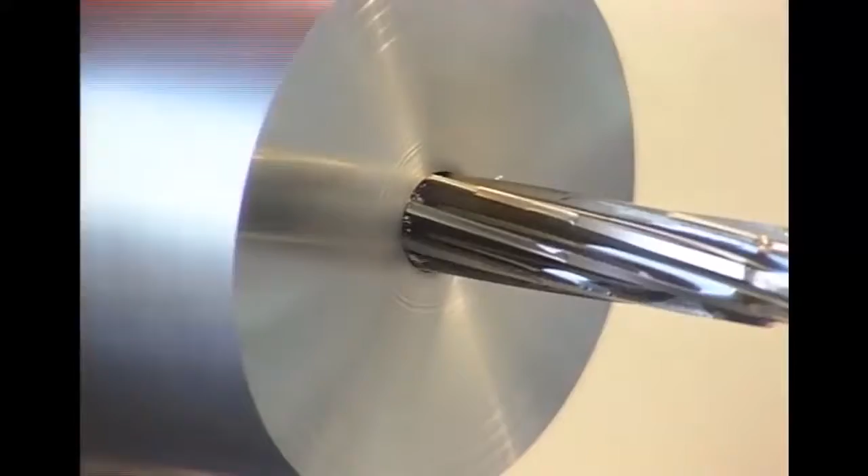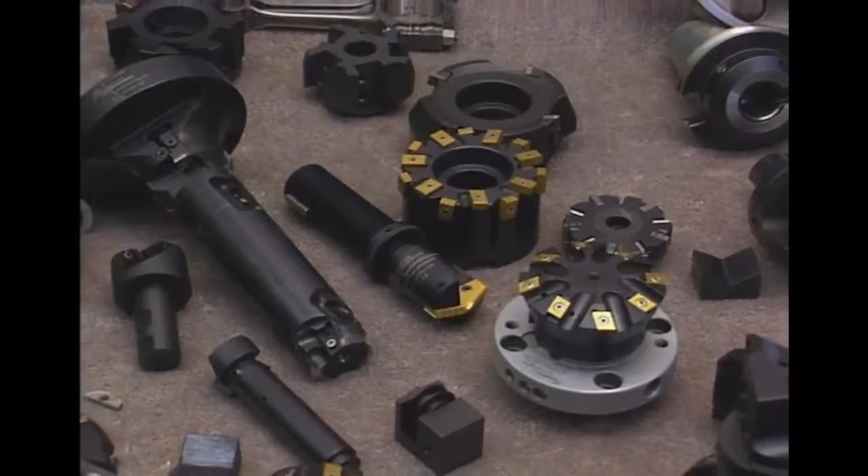Tooling incorporates thousands of different cutting tools and tool holders for discrete parts manufacturing. Principal categories within cutting tools include single-point cutting tools, such as lathe tools, multi-point cutting tools, such as milling cutters, drills, reamers, and taps. Cutting tools are either standard tools, purchased as catalog items, or special tools, designed and built for a special machining job, often to suit a particular workpiece.

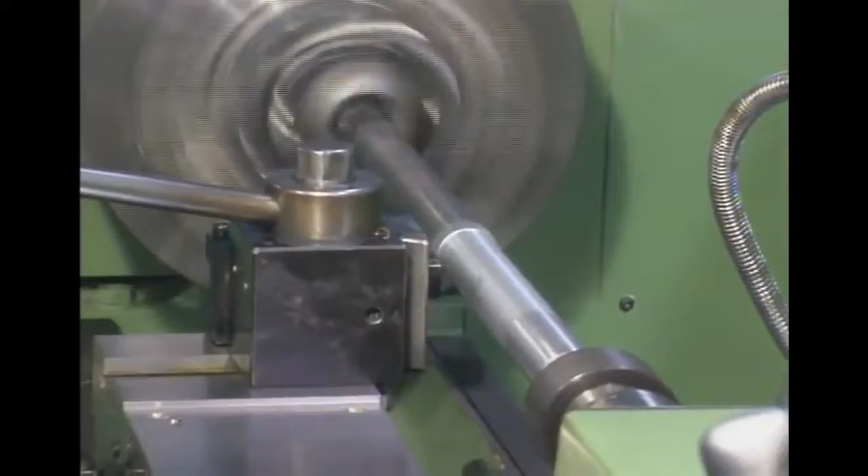The main objective in the selection and application of cutting tools is to safely machine a workpiece in the shortest possible time while meeting the part's quality requirements. Furthermore, the specified tooling should be the least costly and least complex tooling available to satisfactorily fulfill the qualitative and quantitative workpiece demands. It is estimated that nearly 50% of all cutting tools are used incorrectly.

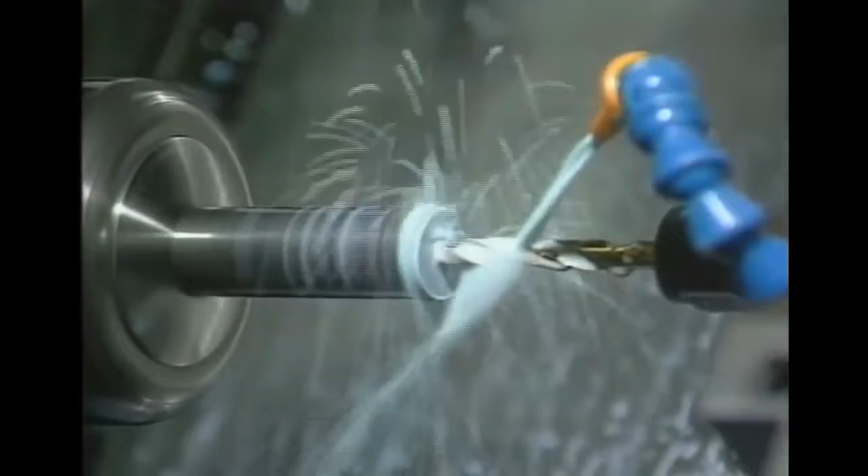Additionally, the number one error when formulating tooling selections is calculating monetary savings based on lowest cost per tool rather than on maximized productivity and extended tool life.

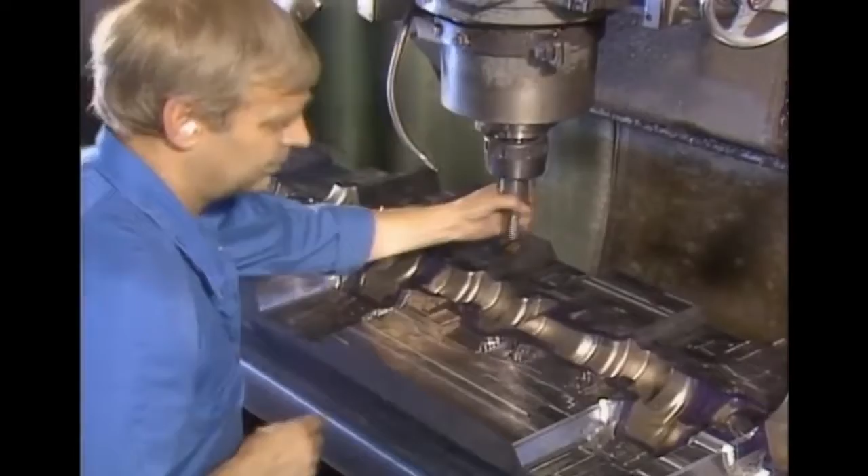To effectively select tools for machining a part, a machinist must have specific information about the workpiece, such as the starting and finished shape, the hardness, the tensile strength, and abrasiveness of the material. These factors all influence the interaction between the tool and the work. The machinist also needs to know whether the workpiece material breaks into short chips easily or whether it tends to flow into long, hard-to-break stringy chips.

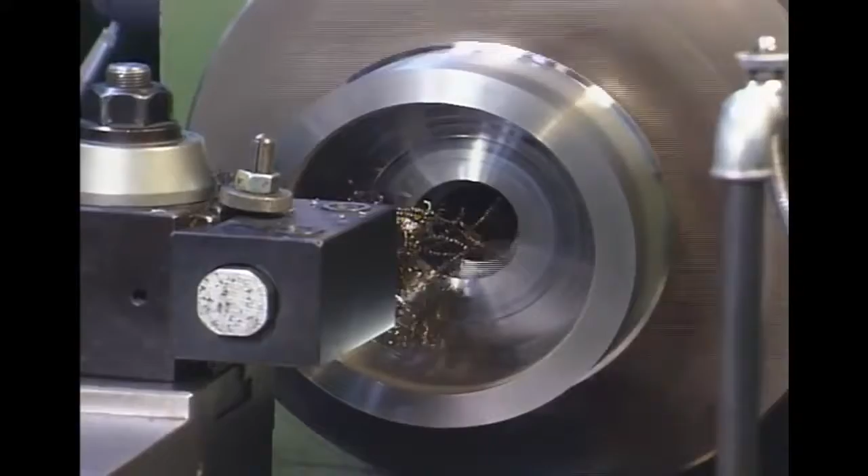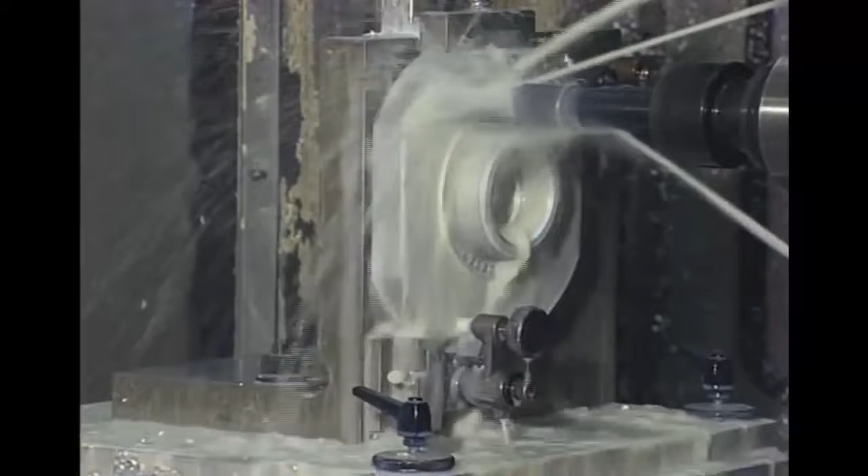Also important is the part's work-holding setup, which properly orientates and holds the workpiece, and the power and speed capacity of the machine tool. Changes in the workpiece material, part tolerances, geometries, and quantities required often demand corresponding changes in the tool materials and/or tool geometries selected.

For the wide variety of machining applications, there is a corresponding necessity for different cutting tool materials. The ideal cutting tool material should be harder than the workpiece it is cutting, be able to retain its hardness and stability at high temperatures, resist wear and thermal shock, be impact resistant to withstand the mechanical shocks of milling, and also be chemically inert to the work material and the cutting fluid.

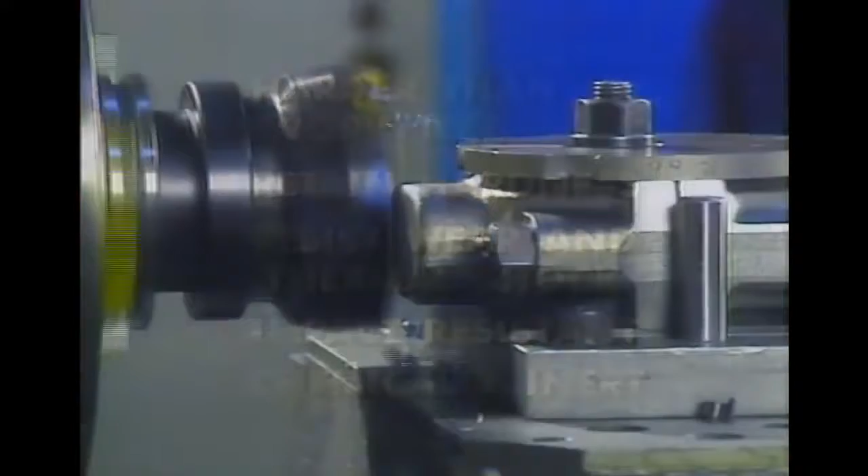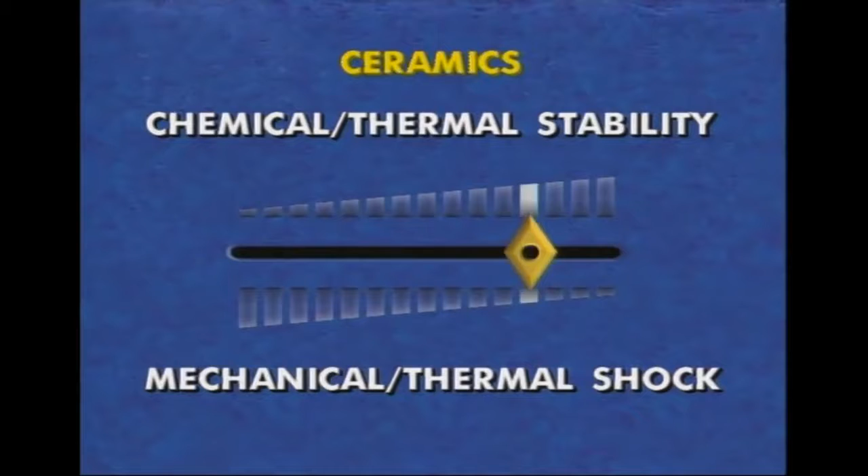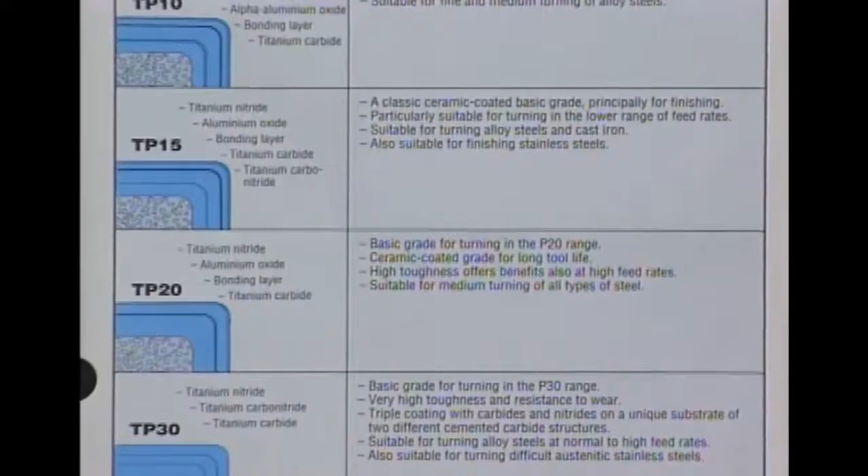No single cutting tool material incorporates all these qualities. Instead, trade-offs occur among the various tool materials. For example, materials with excellent chemical and thermal stability, such as ceramics, tend to be brittle, with limited resistance to mechanical and thermal shock. These variable properties take place both within a material class, such as different grades of carbide, as well as when comparing different classes of tool materials, such as high-speed steel and carbide, or carbide and ceramics.

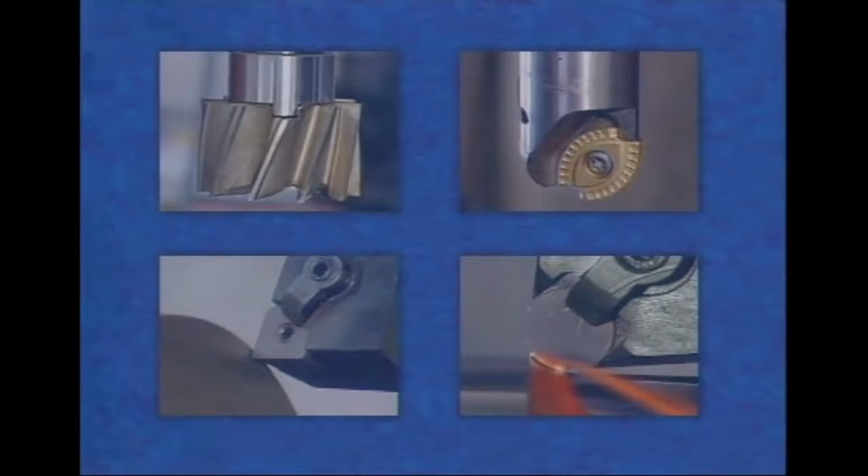Every new and established tool material has an application area in which it outperforms the other cutting tool materials. Newer materials tend to minimize but not eliminate the application of older materials, such as high-speed steel. The development of cutting tool materials has offered steady advancement in the rate of metal removal and, consequently, in the need for more heat-resistant materials. So there has been a progression from high-speed steel to carbide to ceramics and onto other super-hard cutting tool materials.

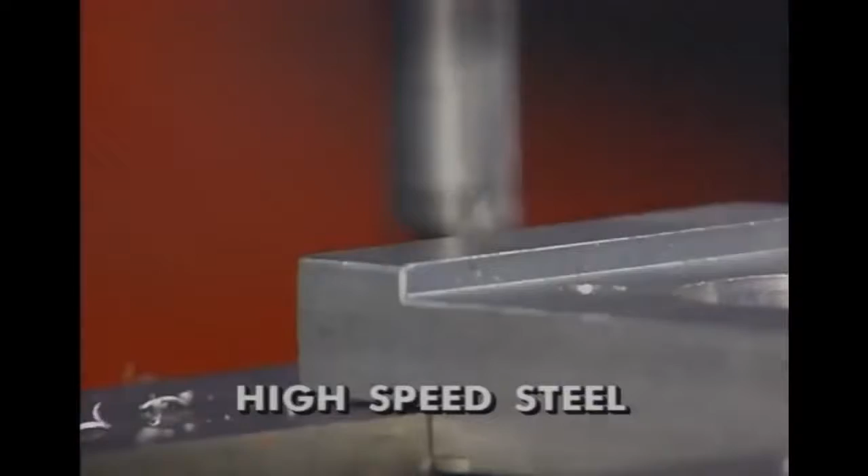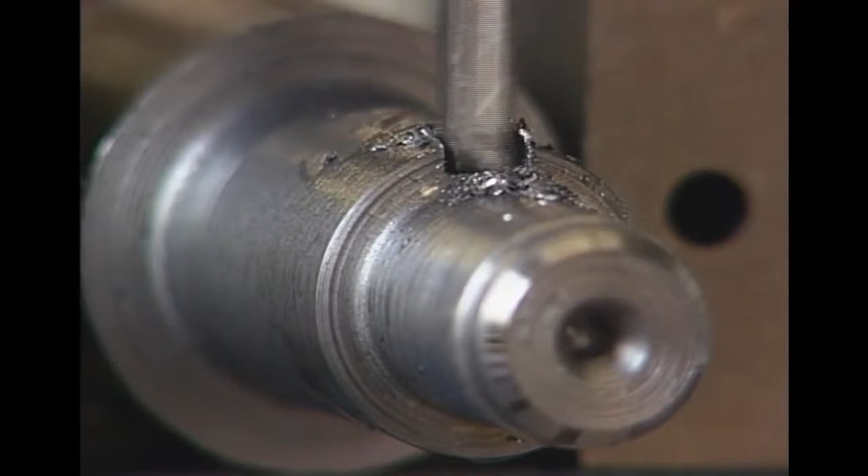High-speed steel tools were introduced around 1900 and gradually replaced the carbon steel tools of the 19th century. High-speed steel cuts about 4 times faster than the carbon steel tools they replaced, hence the name high-speed steel. It operates at temperatures up to 600 degrees centigrade. There are over 30 grades of high-speed steel in 3 main categories: tungsten-based, molybdenum-based, and molybdenum cobalt-based.

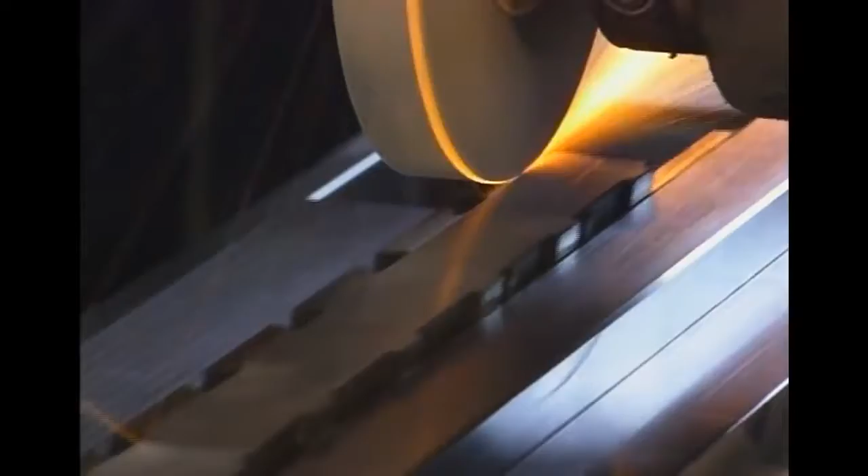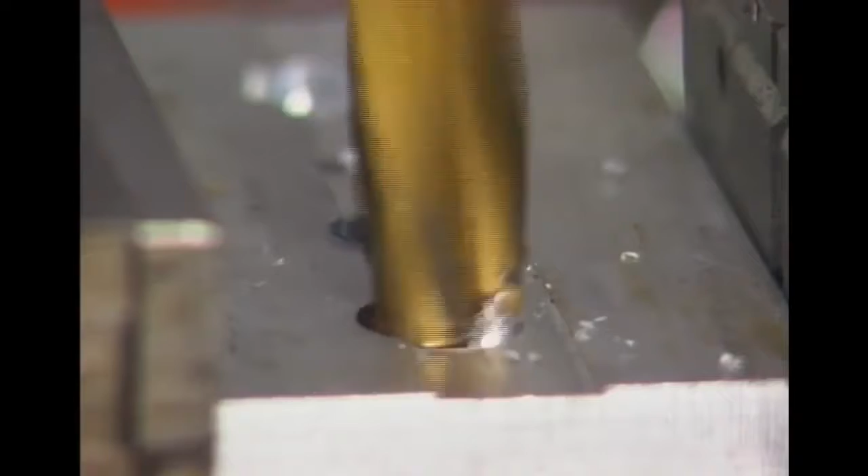Since the 1960s, a form of high-speed steel called powder metallurgy high-speed steel has allowed tools such as drills, milling cutters, and form tools to be made to near-net shapes that offer superior grindability. The use of coatings, particularly titanium nitride, allows high-speed steel tools to cut faster and last longer. Titanium nitride provides a high surface hardness, is resistant to corrosion, and minimizes friction.

In industry today, high-speed steel tools have been replaced by carbide tooling in many areas, but high-speed steel tools are still preferred for some tool room and low cutting speed operations, and for certain tool types such as small diameter drills, taps, and end mills.

Carbide tools were introduced from Germany in the 1930s and today are the most widely used cutting tool materials. Carbide and coated carbide tools in general cut about 3 to 5 times faster than high-speed steel and operate at temperatures up to about 1200 degrees centigrade.

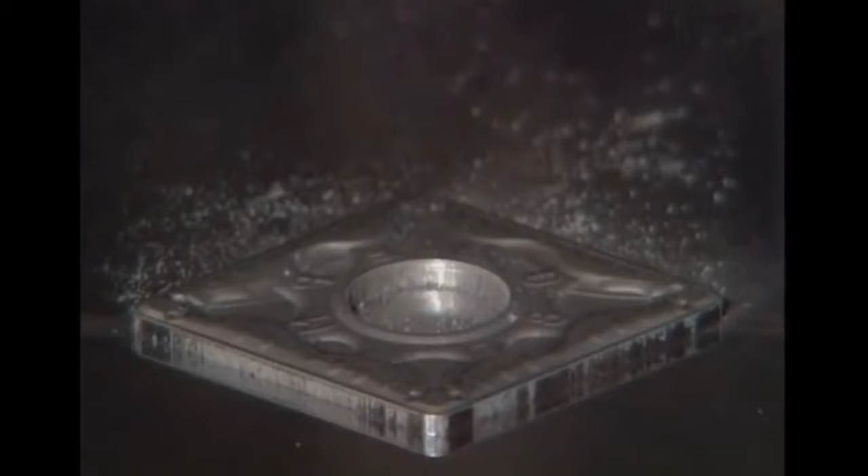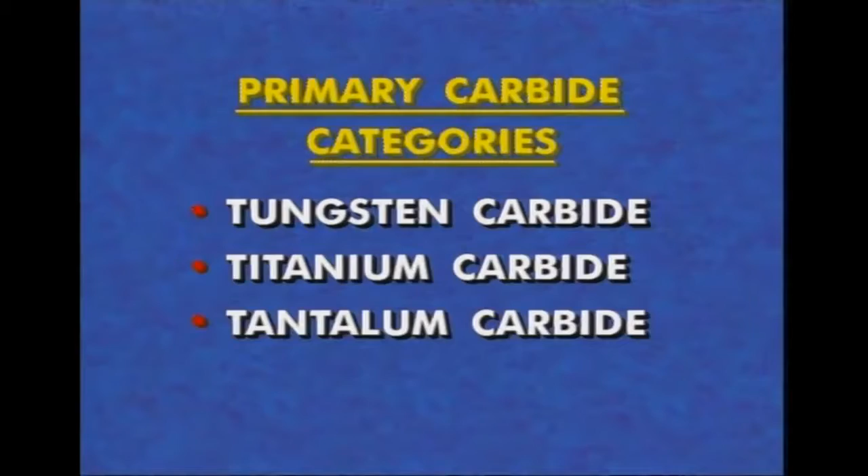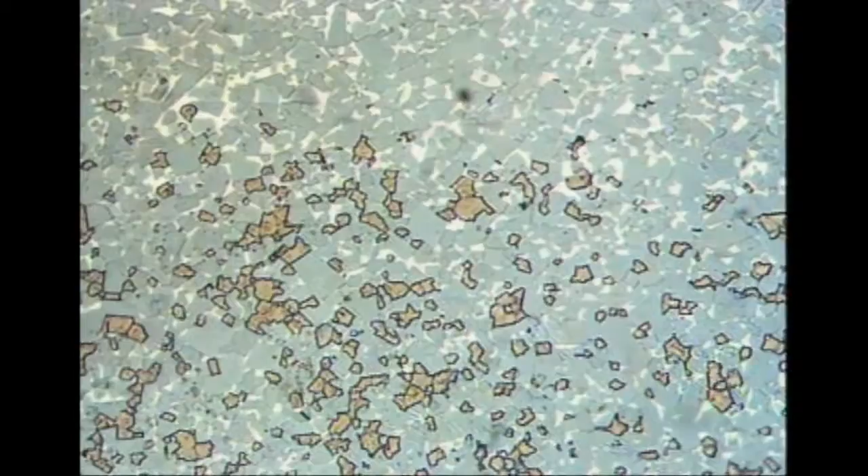Cemented carbide is a powder metal product made up of finely ground hard carbide particles cemented together by a binder. The major categories of hard carbides are tungsten carbide, titanium carbide, tantalum carbide, and niobium carbide. The hard carbide particles are from 1 to 10 microns in size and make up 60 to 95% of the material. The binder is mostly cobalt.

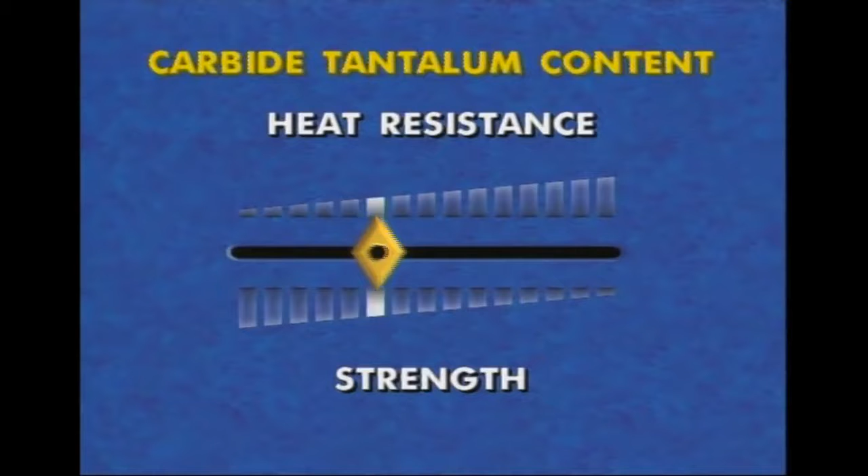Variations in particle size, binder metallurgy, and manufacturing techniques cause the properties of carbide tools to vary widely, particularly in the balance of hardness and toughness. For example, a higher tungsten content increases the wear resistance of a carbide insert, but reduces strength. A higher percentage of cobalt binder increases strength, but lowers the wear resistance. Additions of an alloying agent, such as tantalum, can increase a carbide grade's resistance to heat, but reduces its strength.

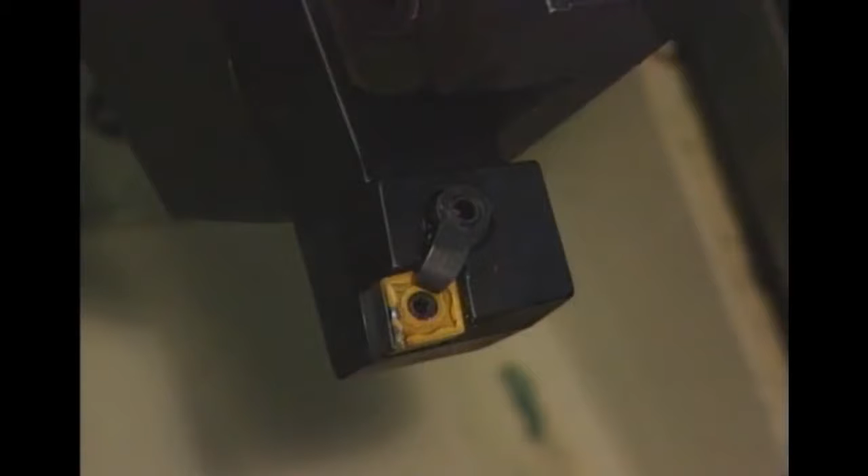Carbide is utilized for solid round tools, such as end mills and drills, or in the form of inserts clamped to a shank or holder. Inserts may be indexed to another position when an edge has worn. When all the tool edges on an insert are dull, the insert is generally thrown away or recycled. Some inserts are single-sided, others double-sided.

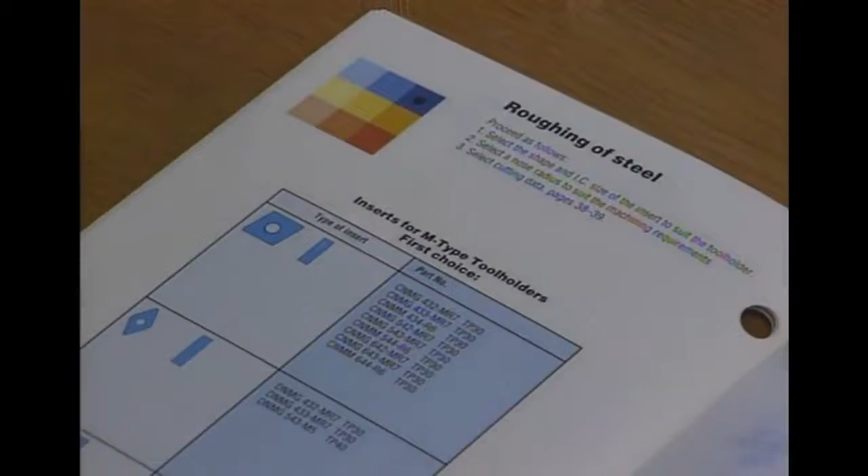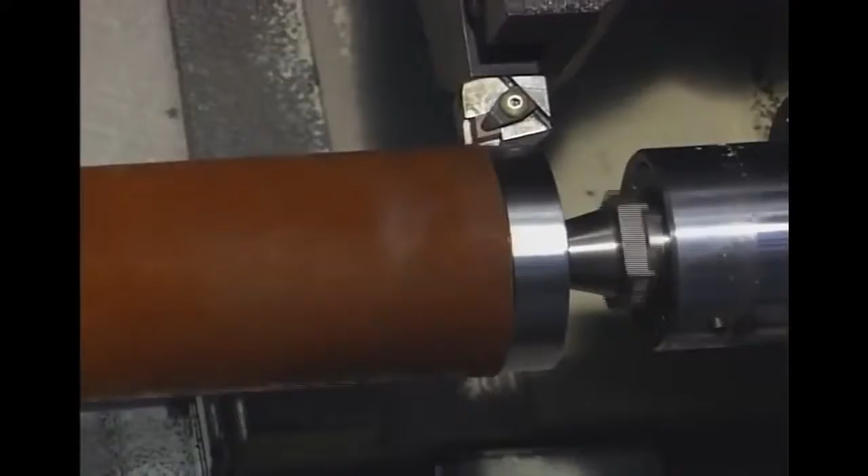Every manufacturer of carbide tools has a variety of carbide grades for specific work materials and types of machining applications. Choosing the correct grade of carbide can double tool life or double the cutting speed for the same tool life. Tough, shock-resistant grades are needed for interrupted cutting. Harder and chemically stable grades are needed for finishing steel at high speed. Heat-resisting grades are needed for machining superalloys, such as Inconel and Hastelloy.

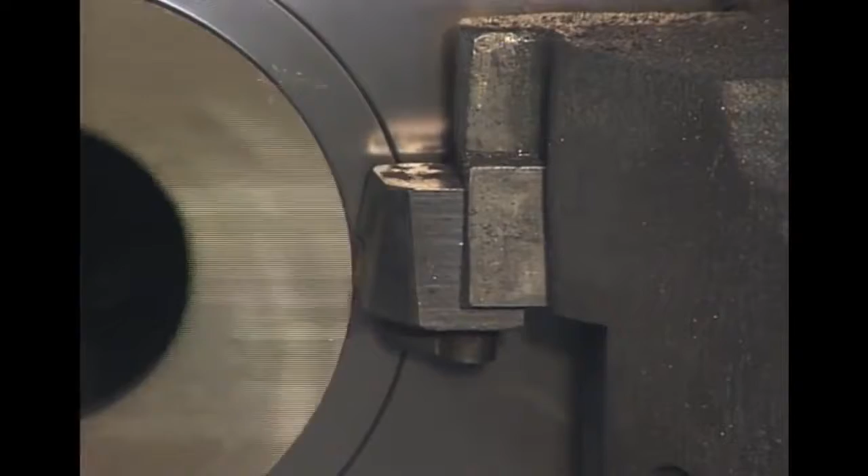There are many considerations when selecting a carbide grade for metal cutting, such as the type of workpiece material, especially its hardness, and the condition of the workpiece's outer skin. If it is a forged or cast workpiece, a tougher insert should be selected. Is the cut heavy, or is the cut light? Is the machine tool and work holding setup rigid or loose? If loose, then a stronger, more durable carbide grade should be selected.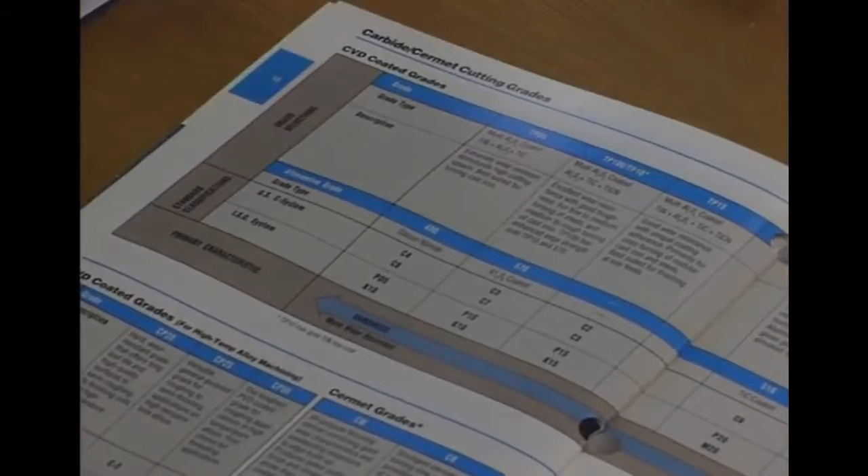Because there are not effective U.S. or international standards for carbide grade specifications, it is the carbide suppliers who recommend which grades they believe are suitable for given applications. Two carbide grades from different suppliers with identical coding in the International ISO 513-1991 standard will likely have different compositions, microstructures, coatings, properties, and most importantly, performance.

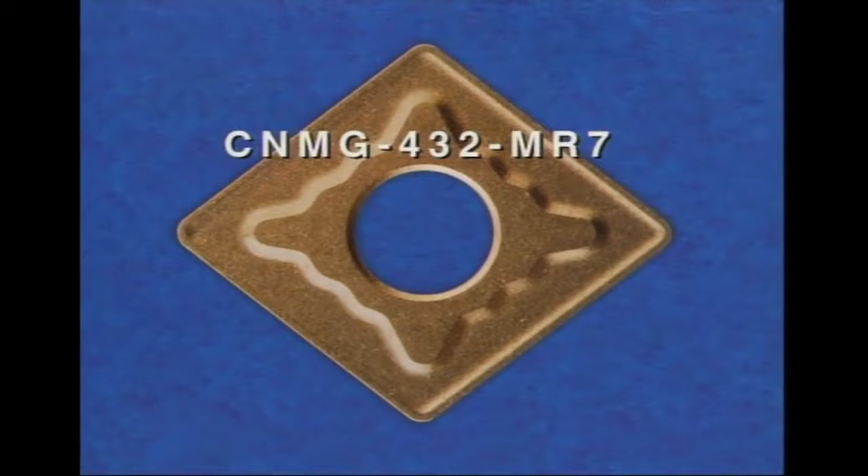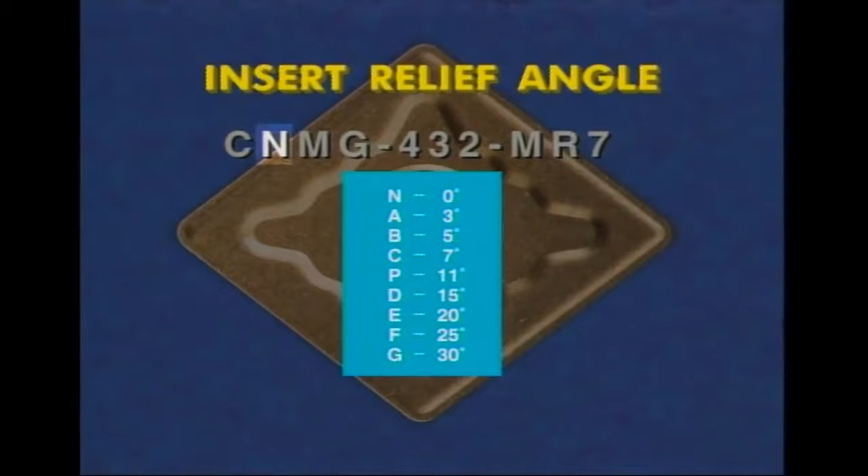Although carbide inserts are not standardized by application, they do carry their own 7-character ANSI code, which is used for their identification. The first character represents the insert's shape. The second character represents the insert's relief angle, which may be from 0 to 30 degrees. The third character represents the insert's tolerance class. Molded inserts usually have a code M tolerance and are the most common.

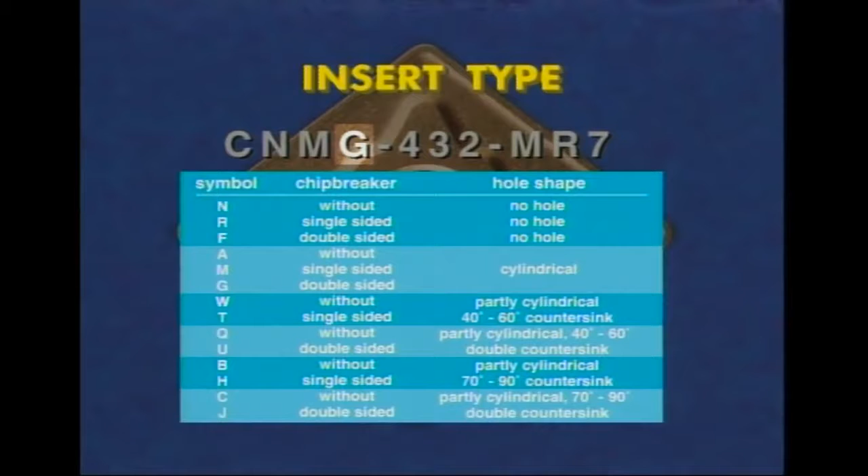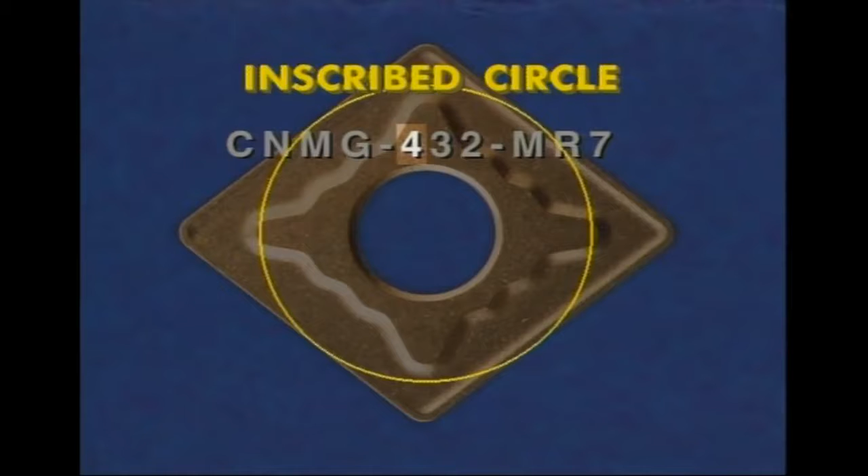The fourth character represents the type of insert with regards to its required clamping system. The fifth character designates insert size by the largest circle which can be inscribed within the perimeter of the insert, known as the inscribed circle or IC size. The sixth character represents the insert thickness. Harder materials and higher feed rates require thicker inserts to withstand the cutting forces. The seventh character represents the corner radius on turning inserts.

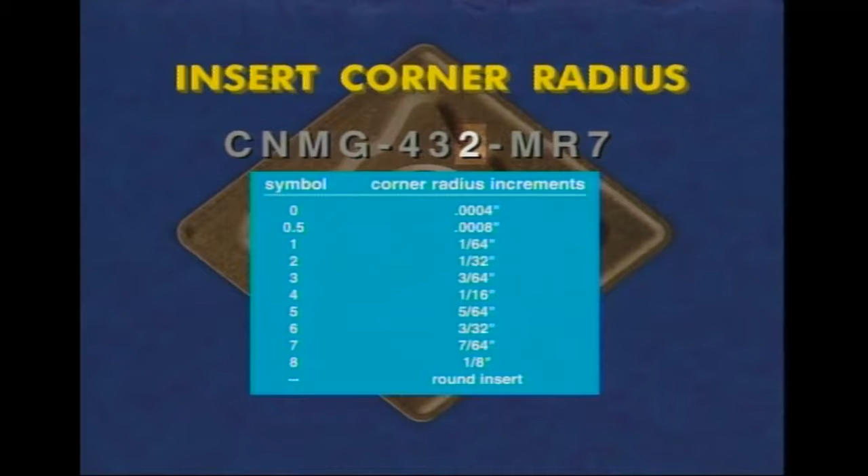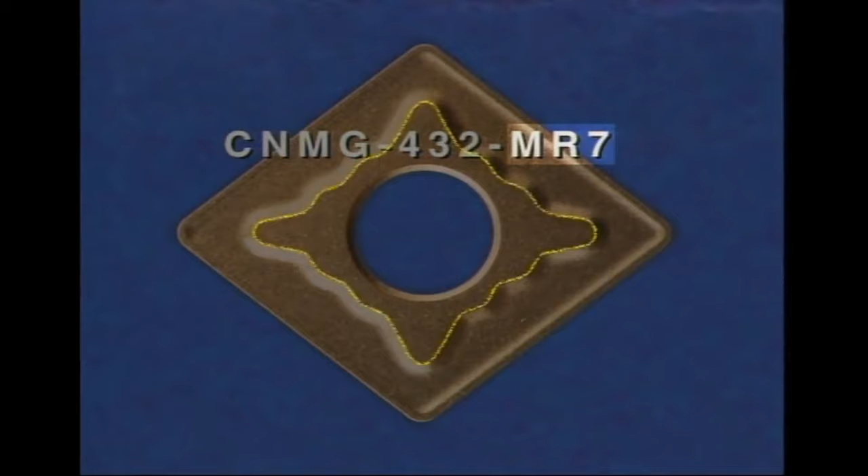On milling inserts, this character represents the wiper edge angle. This ANSI classification system does not categorize everything. For example, the varieties of chip breaker geometries in carbide turning inserts are not required to be covered, but many manufacturers do add a chip breaker code.

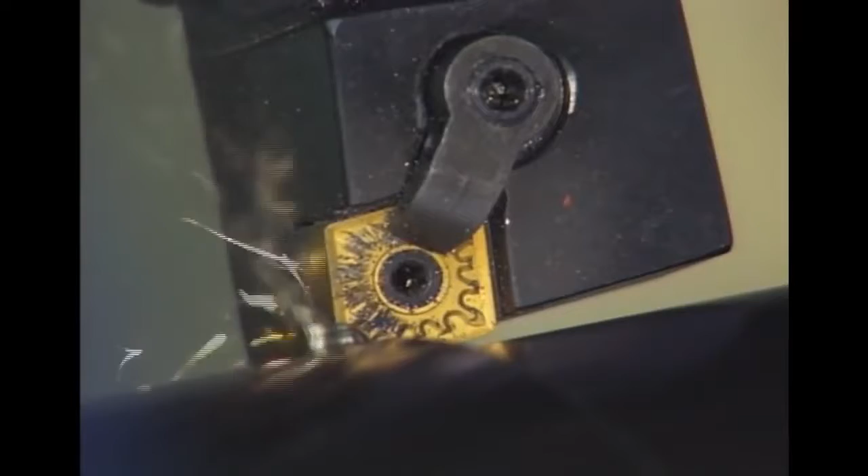2/3 of all carbide tools used are coated, and a coated carbide should be the first tool material considered for most operations. In general, a coated carbide tool may have over 3 times the tool life of an uncoated grade, or may operate at cutting speeds 2 to 4 times higher for the same tool life. These coatings help overcome carbide's primary limitation, that is, as fracture resistance or toughness increases, wear resistance or hardness decreases. These wear-resistant coatings provide carbide grades with broad application ranges, offering a combination of characteristics not obtainable with carbide alone.

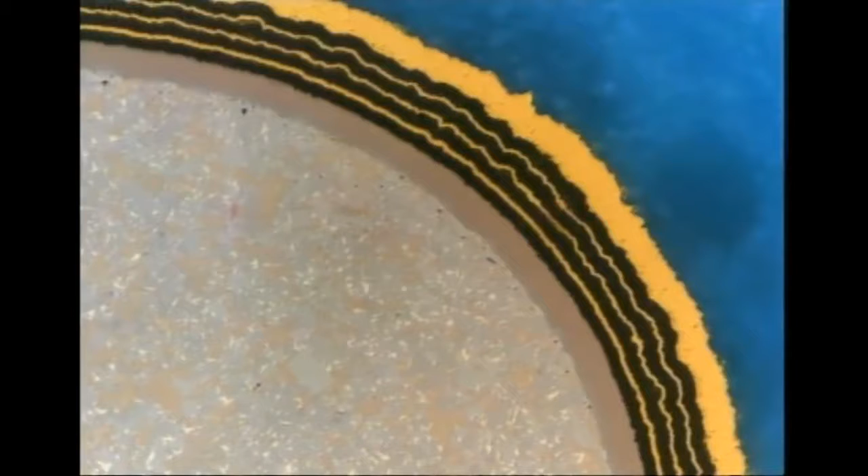Most coatings are under 1/1000th of an inch thick and have several layers. Each layer has a particular benefit, such as resisting heat or decreasing friction. The main insert and cutting tool coating materials are titanium carbide, titanium nitride, aluminum oxide, and titanium carbonitride.

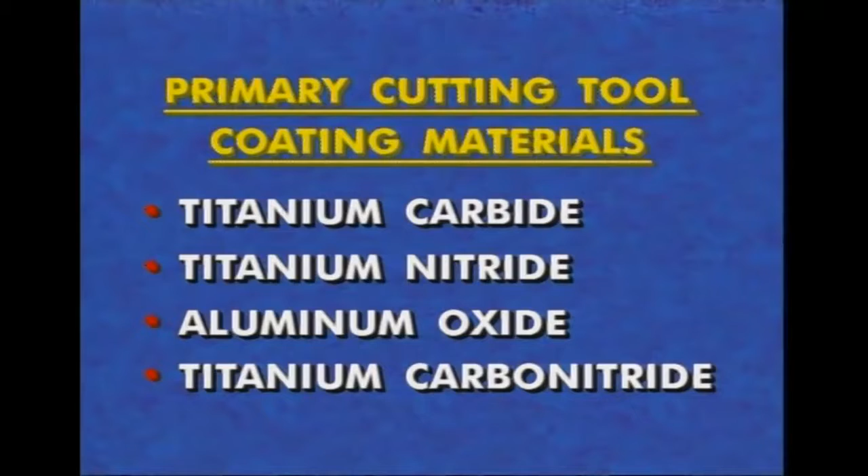Aluminum oxide and titanium carbide are very hard and chemically inert, and titanium nitride minimizes friction. For an appropriate coating, the coating material must adhere or bond strongly to the carbide tool surface. The two major coating methods are chemical vapor deposition and physical vapor deposition.

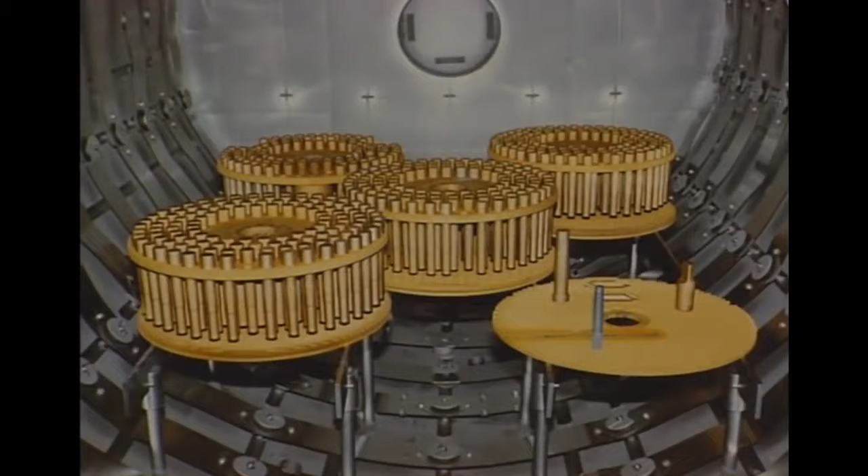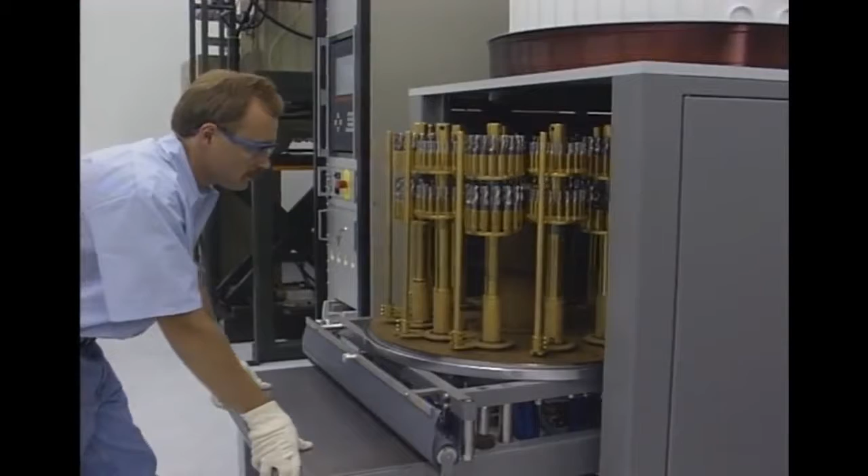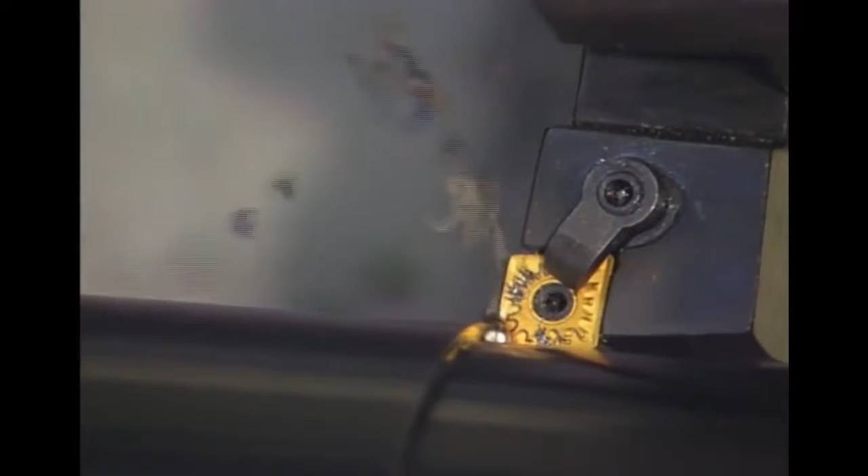The chemical vapor deposition process takes place at about 1000 degrees centigrade and is typically required for multi-layer coatings. The physical vapor deposition method takes place at temperatures around 500 degrees centigrade and is used for single-layer or dual-layer coatings. Coated carbides are more costly on a per-insert basis than uncoated inserts, but they achieve greater productivity. In terms of parts per edge, the coated carbides have the advantage.

Ceramic tools are harder and more heat-resistant than carbide tools, but also more brittle. They have been successful in machining cast iron, hard materials, and superalloys. Best results are at high speeds, which mean high cutting temperatures.

Ceramic cutting tools can be divided into alumina-based ceramics and silicon nitride-based ceramics. Alumina-based ceramics are used for high-speed semi-finishing and finishing of ferrous and some non-ferrous materials. These tools are not good with aluminum because of an affinity between the materials. Alumina-based ceramics offer mechanical and chemical wear resistance, but lack toughness and thermal shock resistance. Thus, they are generally not used for milling, rough turning, or for interrupted cuts.

Silicon nitride-based ceramics, also called sialons, offer greater toughness and thermal shock resistance than alumina-based ceramics. They are used in high-speed roughing applications and have excellent abrasion resistance. Silicon nitride-based ceramics are used for high-speed machining of gray cast iron, as well as on superalloys such as nickel and cobalt-based work materials.

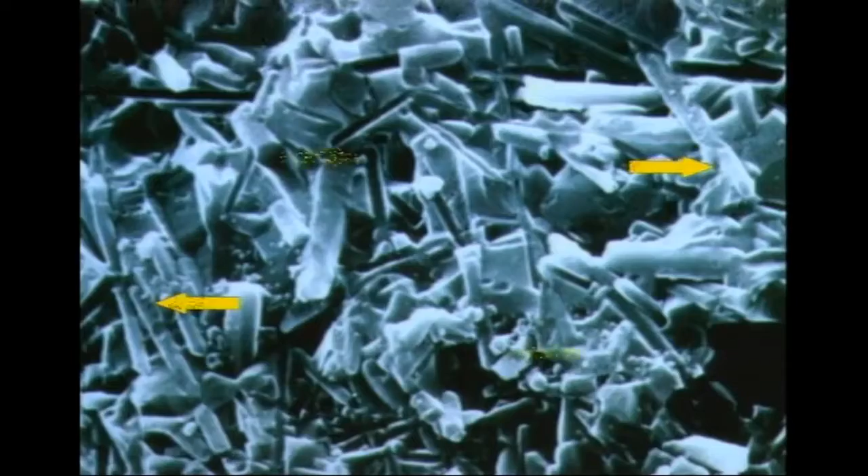Whisker-reinforced ceramics with silicon carbide reinforcing whiskers in an aluminum oxide matrix are stronger than the brittle ceramic matrix alone. The whiskers act like rebar in concrete, adding mechanical strength and thermal conductivity.

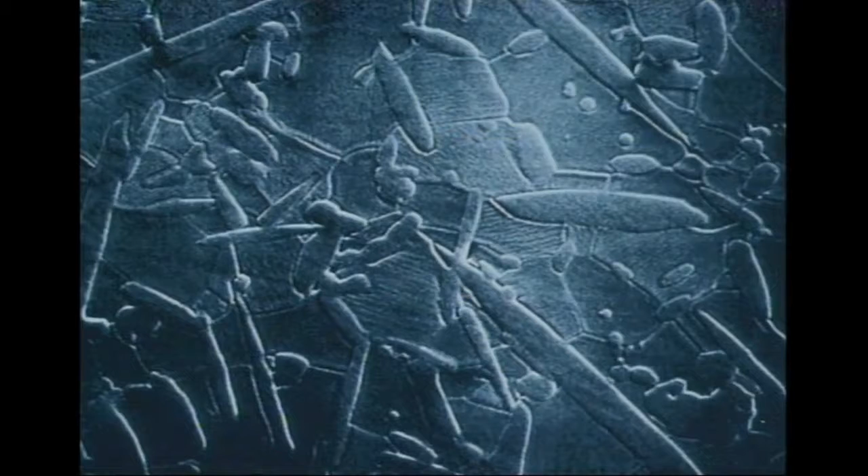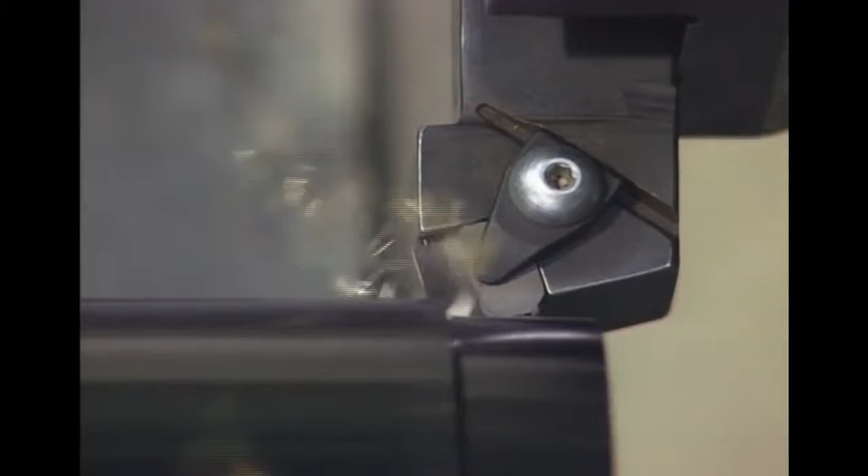Cermet tools are composed of materials commonly applied as coatings to carbide tools, titanium carbide and titanium nitride. The solid Cermet insert offers excellent resistance to various causes of wear in machining, especially chemical resistance. Initially used only for semi-finish and finish turning and boring, some Cermet grades are now tough enough to handle rough turning as well as milling applications on carbon steels, stainless steels, and some ductile irons.

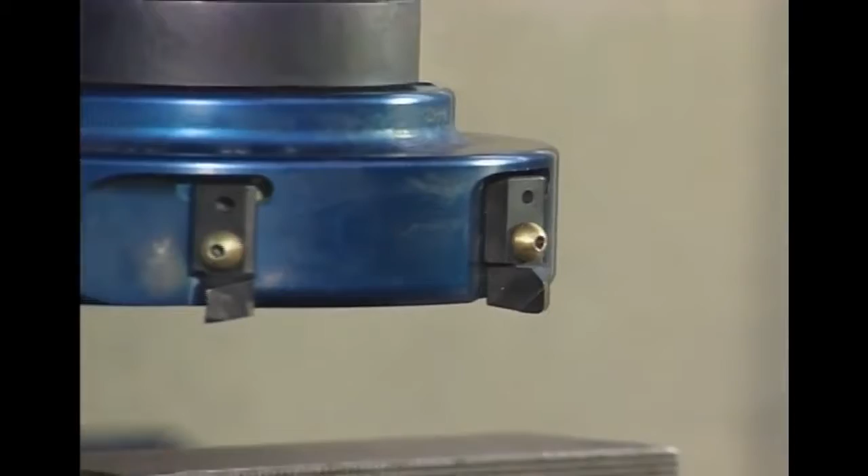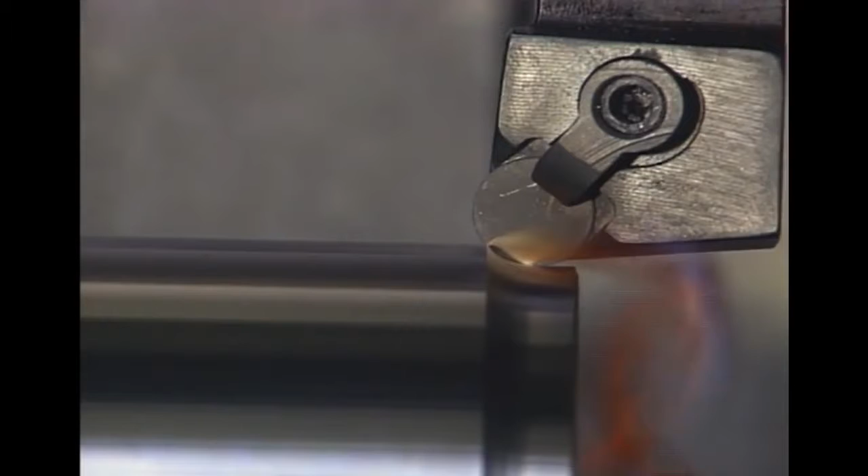Super hard tool materials are divided into two categories: cubic boron nitride and polycrystalline diamond. Typically, a small tip of one of these super hard materials is bonded to a carbide insert base. Super hard inserts may cost 30 times more than a carbide insert, so their use is limited to well-chosen, cost-effective applications. Cubic boron nitride, or CBN, the second hardest material after diamond, is used to provide long tool life in machining very hard, tough ferrous materials, hardened die steels, alloy steels, and hard-facing materials.

CBN is a hard, brittle material requiring cutting-edge preparations to suit application needs. Other techniques are utilized to protect the cutting edge, such as the use of a lead angle where possible, and a strong shape, such as round or square, are recommended.

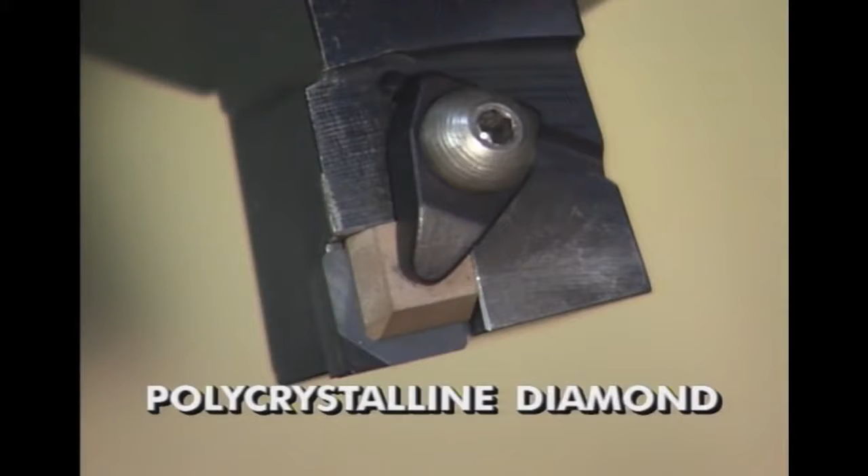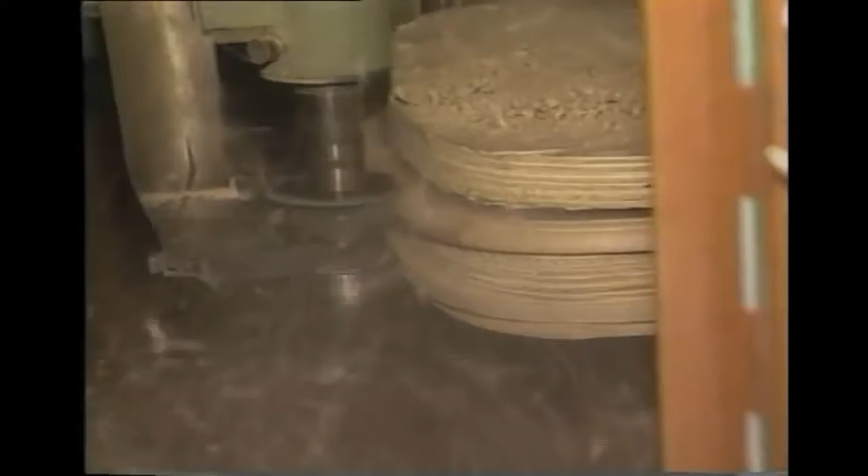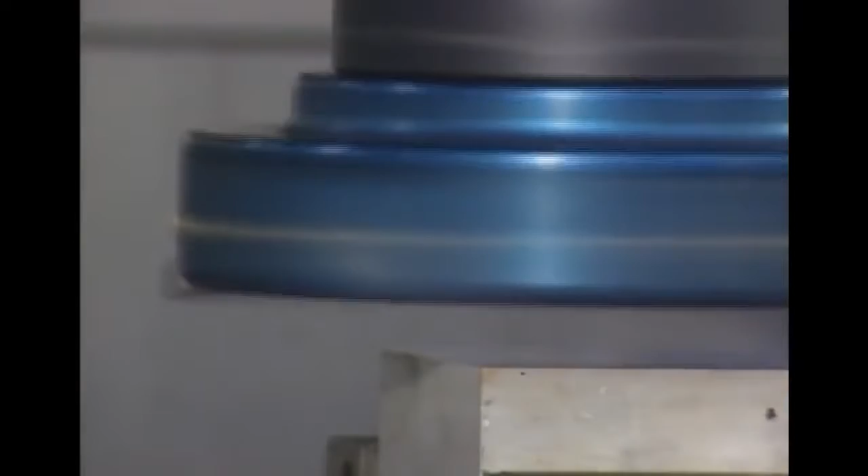Polycrystalline diamond, or PCD, is composed of micro-sized diamond particles in a metallic binder and is over 50 times harder than common carbide. PCD is used for non-ferrous applications and also cuts abrasive materials such as glass, reinforced plastics, and hardwoods for furniture manufacturing. In some high-volume applications, PCD inserts have machined parts for 6 months before having to be replaced, outlasting carbide by up to 100 times.

Diamond-coated carbide and ceramic inserts are a recent addition to cutting tool materials. They offer a greater variation in geometries than do PCD inserts, but like PCD, can only be used for machining non-ferrous materials.

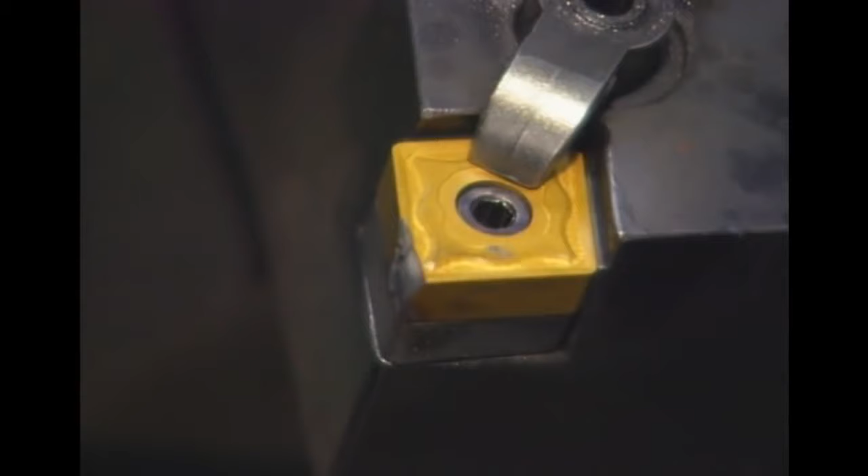All cutting tools have a working life, and then they dull, fail, or fracture. For this reason, they are called perishable tools. The cutting tool life cycle may be a single use or involve indexing to multiple edges, as with an insert, or multiple resharpening, such as with drills, end mills, and taps. It is a safety hazard to run any cutting tool until it breaks. This creates scrap, impacts tool and part costs, and reduces productivity.

Aside from breakage, cutting tools wear in many different ways. Edge wear and flank wear are both a normal and slow type of tool wear. In carbide turning of steel, it often occurs after 15 to 30 minutes of cutting. If the work material is highly abrasive, such as with certain cast irons, this type of wear will accelerate. To correct this problem, select another more abrasion-resistant tool grade.

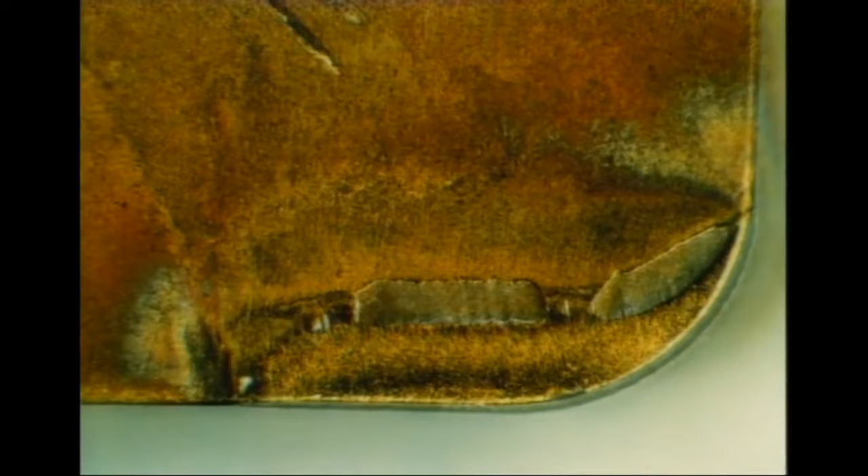Cratering, or top wear, behind the cutting edge occurs commonly in machining long chipping steels, from abrasion and diffusion wear. If the crater grows large enough and contacts the cutting edge, the tool fails immediately. To combat cratering, use hard grades of carbide with tantalum carbide or titanium carbide and hard coatings such as aluminum oxide or other materials such as cermets or ceramics.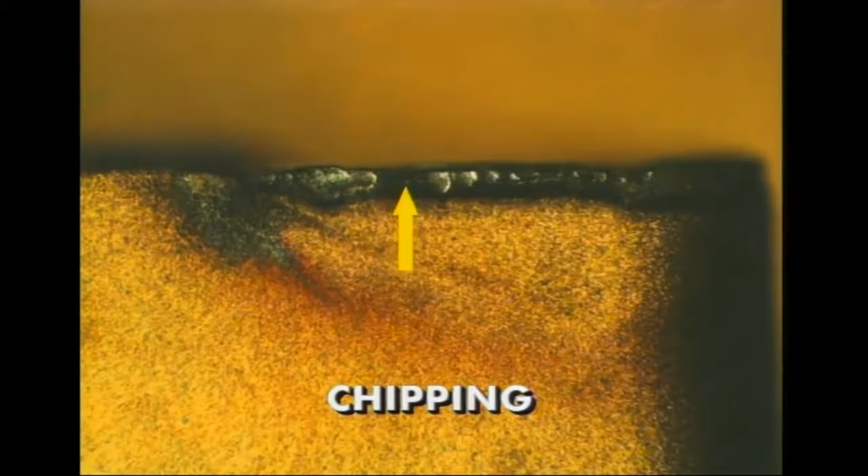Chipping on a tool edge is an unpredictable form of tool failure. It is sometimes started when a high point on an edge breaks away. A stronger carbide grade, different edge preparation, or lead angle change may eliminate chipping.

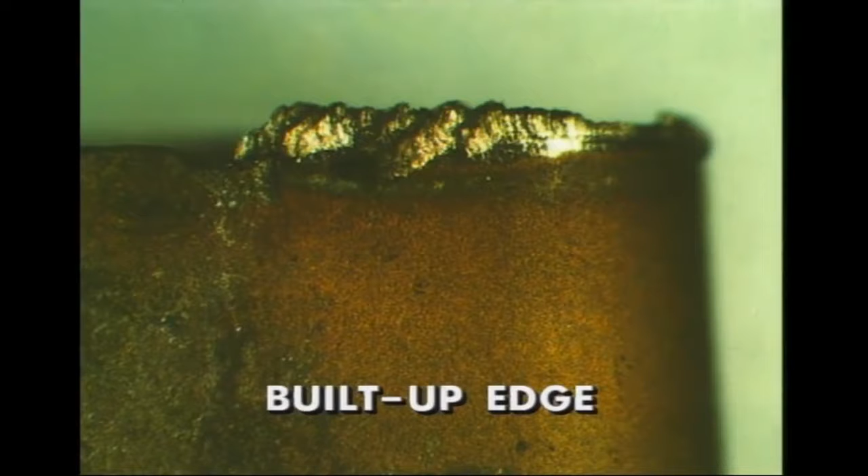A built-up edge is a deposit of workpiece material adhering to the rake face of the insert. Chips weld themselves to a cutting edge. Sometime later, the deposit breaks off and pulls small pieces of carbide out of the edge. This occurs at or just behind the edge. Ductile materials such as low-carbon steel, soft aluminum, and copper cause this damage. Higher rake angles, faster cutting speed, and higher pressure cutting fluid all help eliminate built-up edge.

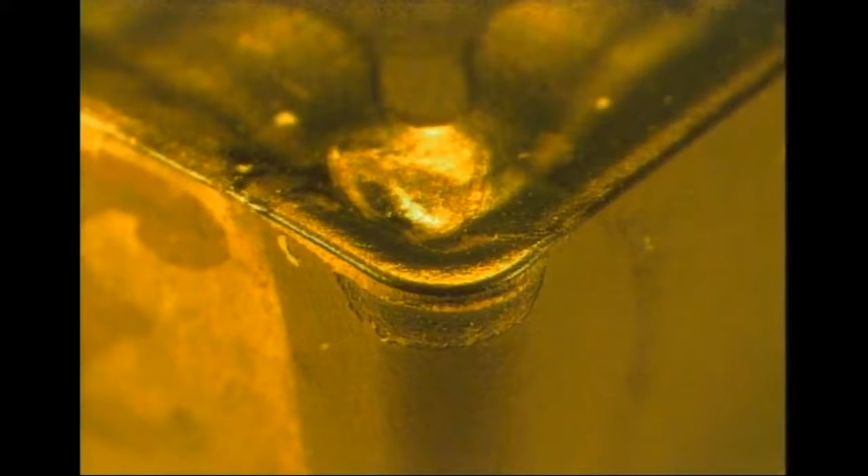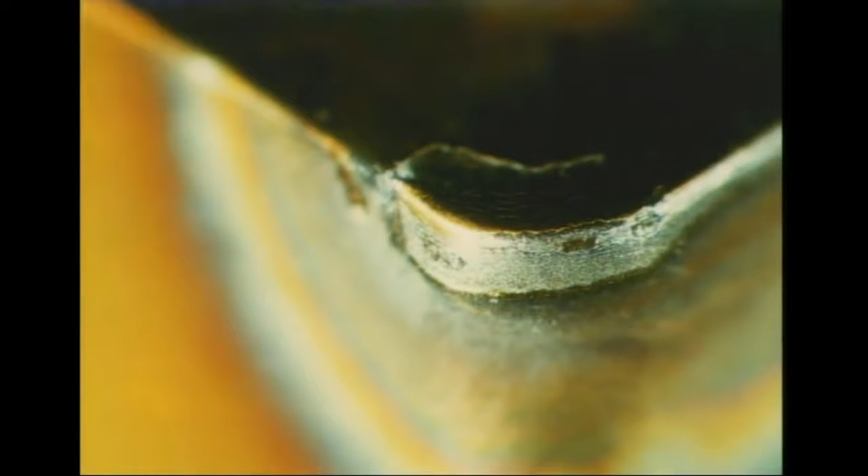Deformation takes place at very high temperatures, 1800 to 2000 degrees Fahrenheit. These temperatures cause the insert binder material to soften, depressing the top surface and mushrooming the sides out into the clearance angle, where it is abraded away. Deformation is difficult to detect without the use of a microscope. A deformation-resistant grade and/or high hot hardness coating is required, or else reduce the operation speed to reduce the heat.

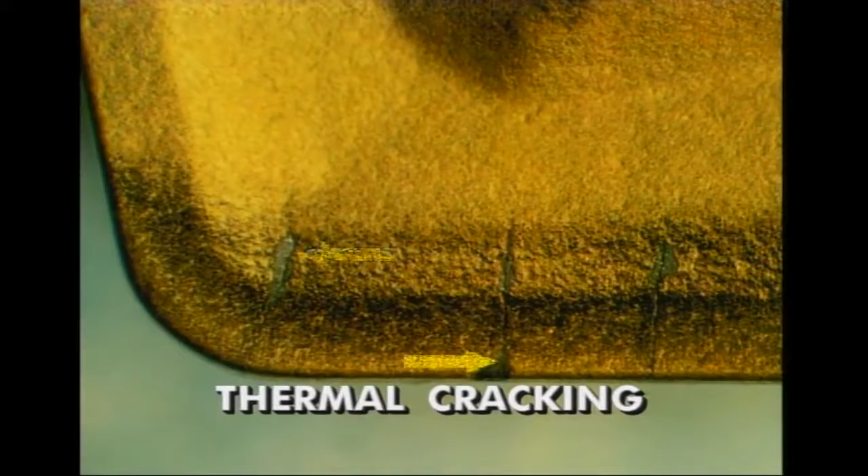Thermal cracking occurs when inserts go through a rapid heat-cool cycle, such as in either interrupted cutting or when the coolant is improperly applied, suddenly cooling a hot insert.

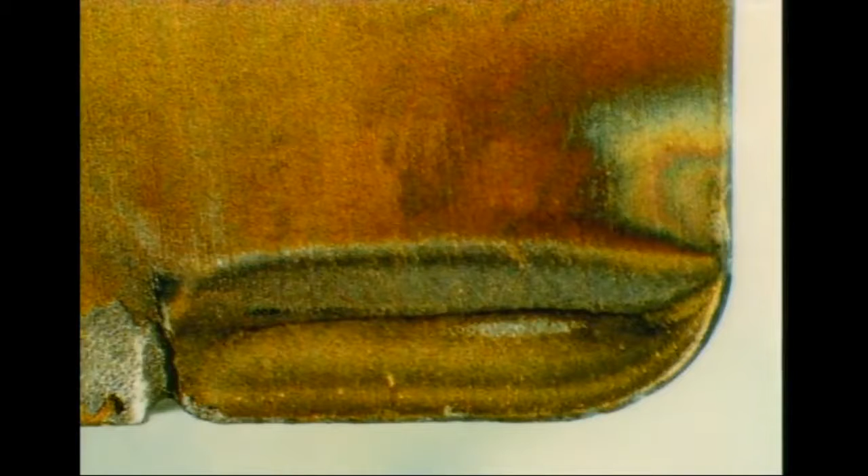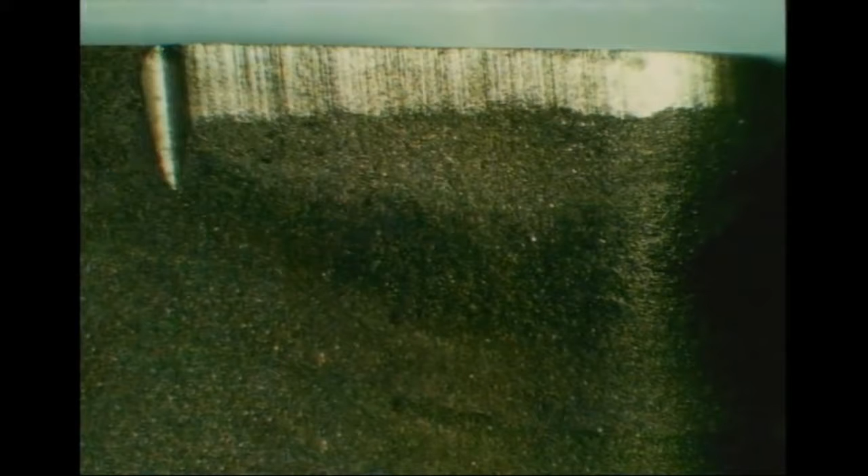A notch at the depth of cut line may occur in machining high-temperature alloys or with any very hard outer layer, such as in a casting or forging. This is caused by the pull-out of small particles of tool material at the flank, face, and cutting edge by the pressure welding of work material to the tool material. An edge preparation on the insert and an increased lead angle may decrease notching.

These are only some of the natural causes of tool wear. Maximum tool life can be achieved through selecting the proper insert or tool material or altering the cutting conditions.

Let's re-examine the material contained in this videotape. The main objective in the selection and application of cutting tools is to safely machine a workpiece in the shortest possible time while meeting the part's quality requirements.

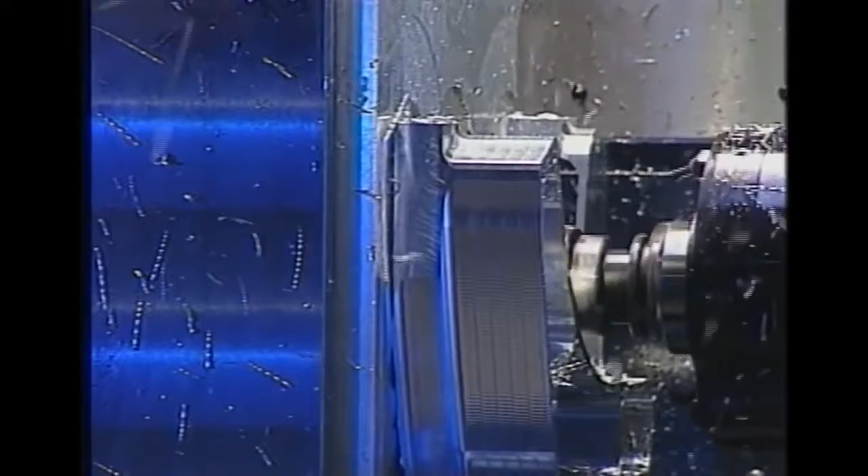There is no ideal cutting tool material, but the rapid evolution of tool materials has given us a wide choice to meet any need. High-speed steel tools are commonly used in tool rooms and in low-speed operations. Round tools such as drills, taps, and end mills are commonly made of high-speed steel. Coatings have extended the applications and cutting life of high-speed steel tools.

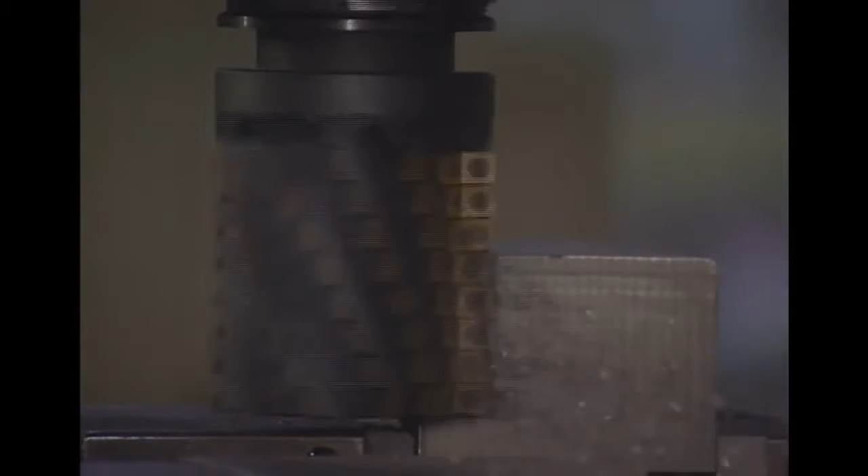Carbide tools, particularly coated carbides, are today's most common cutting tool material. There are a great variety of carbide compositions and coating types. Carbide tools may be indexable inserts or solid round tools such as small diameter end mills or drills. Coated carbide inserts are the first tool material to consider for most production operations. Most insert coatings have multiple layers to protect the tool against abrasion and chemical wear.

Ceramic inserts may be alumina-based or silicon nitride-based. They withstand higher heat than carbide, have good resistance to abrasion, and they cut very fast. But ceramic inserts are less shock resistant than carbide tools, so their applications are limited.

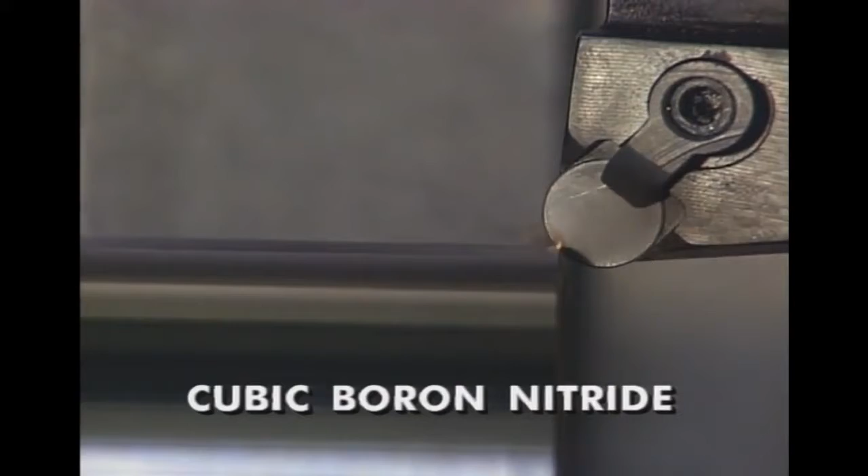Cermets are composed of titanium carbide or titanium nitride with excellent resistance to various forms of wear. But cermets do not withstand high heat well. The super hard materials are cubic boron nitride, CBN, for ferrous applications, and polycrystalline diamond, or PCD, for non-ferrous applications. Both materials are expensive, but can outlast carbides by 10 to 100 times.

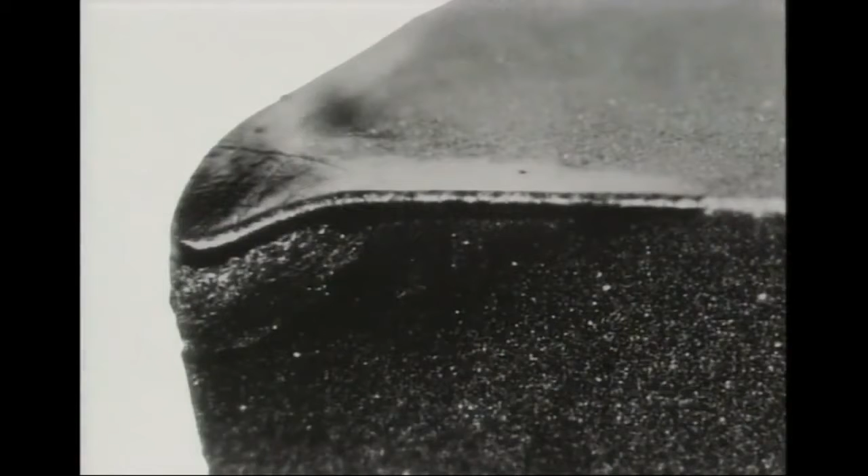All cutting tools have a finite performance life. Then they wear out or fail. Hence, they are called perishable tools. The varieties of cutting tool wear include edge wear, flank wear, cratering or top wear, chipping of the tool edge, deformation, and the edge damage caused by the pulling away of material on a built-up edge. Two other types of tool wear are thermal cracking and notching.